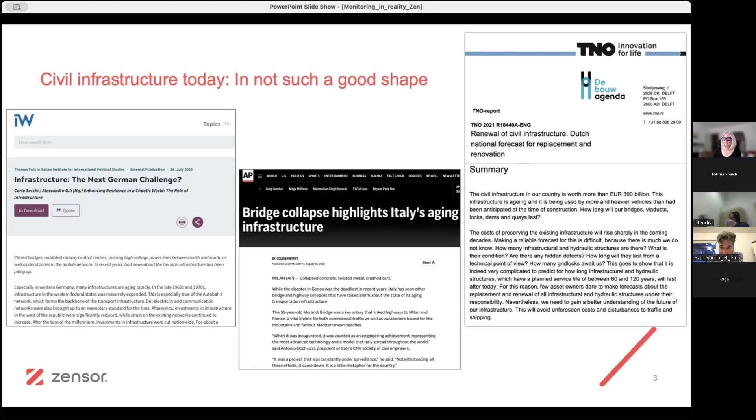Second to that, there's also another issue. A lot of the infrastructure you see, or almost all infrastructure, is built by what you call contractors, civil contractors - big companies that have people, big machines, and that really build the structures. An important background: the majority of civil infrastructure you use today is built based upon what you call a tendering process.

So a public authority says, I need a bridge in this location, it roughly has to look like that. Then they go to the market and invite potential construction companies to bid for that work. People say, okay, I can do it for this amount of money. Another contractor says, I can do it for that amount of money.

In the majority of cases, the cheapest bid wins. On the one hand, you could say this is interesting because, as a society, this is a way to save money. On the other hand, the situation has evolved such that the big construction companies doing those things economically are running on a margin of 0.5 to 1.5% of their revenue. That economically is actually totally crazy - it is super unsafe, meaning if anything goes wrong in any of those projects, that could mean, and it has meant in the past few years, the bankruptcy of an entire company.

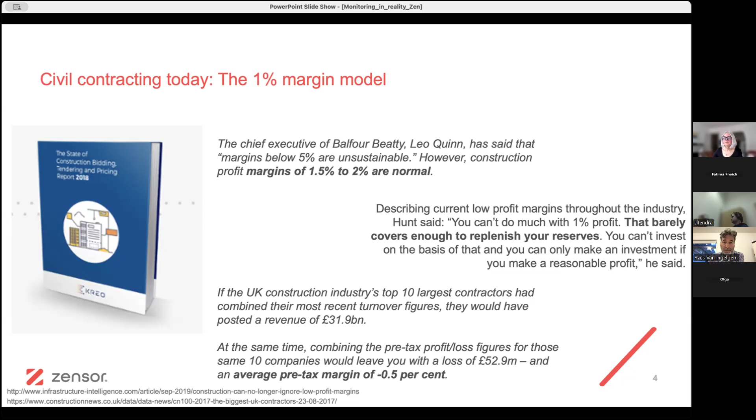And when the renovation was in progress, one of the professors at MIT said, this is strange because it's hard for me now to bike across the bridge. This costs money, this is a lot of hindrance to users. Is this the right way?

What he did as a result of that reflection is do a number of calculations. He asked, what would be an alternative? One alternative would be, instead of building the bridge, letting it age, and fixing it with a major overhaul years later, maybe I could do something else, or we could do something else. The approach he proposed was to build a structure and then continuously monitor, inspect, and do small interventions every time it is needed.

When you see a small degradation or a change that requires attention, and then he ran some models. If you would follow that approach, then at the moment the restoration was finished, the authority had spent $250 million. If they would have adopted a monitor, track, and fix approach since the beginning, on the same date, that bridge would have been in the same good condition, but for only $81 million.

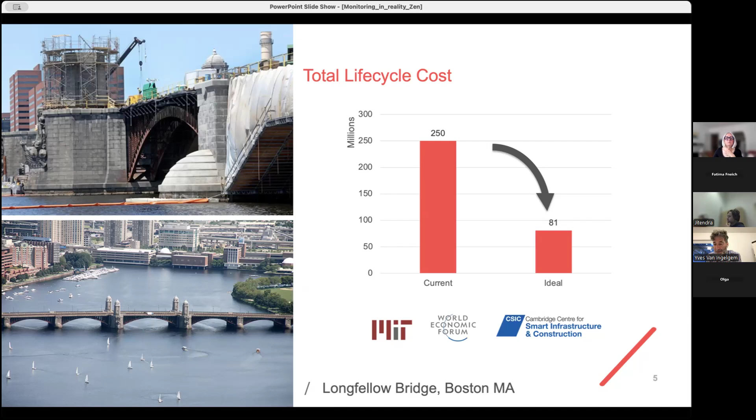So there's a lot of replacement going on that costs a lot of money. Something else you could do is avoid that a structure breaks or is damaged and you have to repair it. But you could also think about extending the life. And that also has a value because, of course, you do not have to build something new. You can still continue using the structure that you have. That has an ecological value, but it also has a financial value because that means you can actually defer the investments on that structure.

And here we're saying if we can increase the service life by 10%, some authorities can go into the billions of euros of savings. That's enormous if you look at countries' budgets.

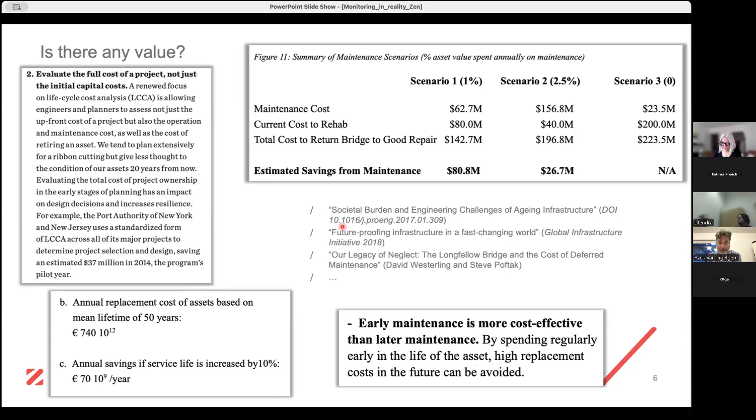So just to give you a few numbers on the why and the relevance of all that follow-up, and maybe of a lot of the things you are doing now in your research life. We're not there yet, this is not fully implemented at all, but there is certainly a value if we can take better care of the infrastructure we have as a society.

Any questions at this point, or remarks or contributions? Silence will be interpreted as a no.

Also, it can be that operational conditions are changing, so you want to keep checking if the building or structure is still fit for purpose. The extension of the design life, as said, can we use it longer than it was initially intended? If things change, if you want to do an extension or use it differently, can it live with it? Can it survive that?

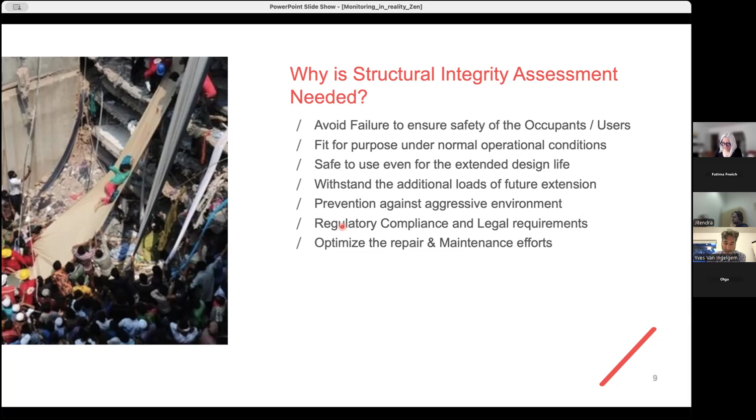The environment may change, loads, regulatory compliance, so legal requirements may change or evolve, or you just have to check if you're compliant to certain rules. And then, optimizing the repair and maintenance efforts, also on the general checking, what does it cost me to keep this building running?

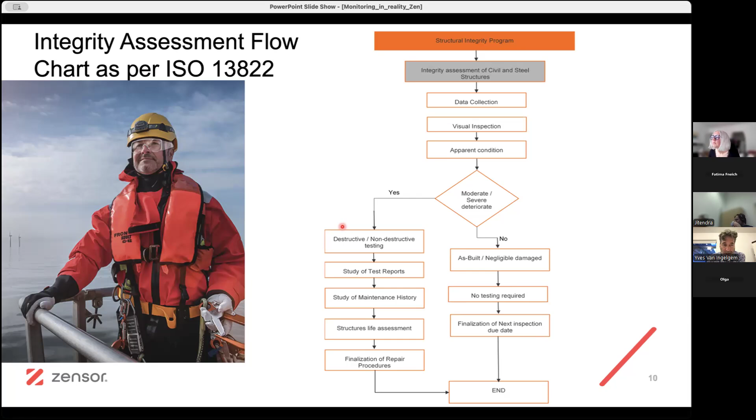One approach is not based on monitoring, it's based on doing measurements and inspections, and that is covered by an ISO norm. I've seen within the project it's sometimes referred to, a number of instruments we'll be seeing later, but that's really a program that is set up where you have regular inspections, a lot of people involved, a very regulated process. This is already very valuable because it gives you insights into the state of the structure, what's happening. We see deviations, yes and no, they can be interpreted, their severity can be assessed.

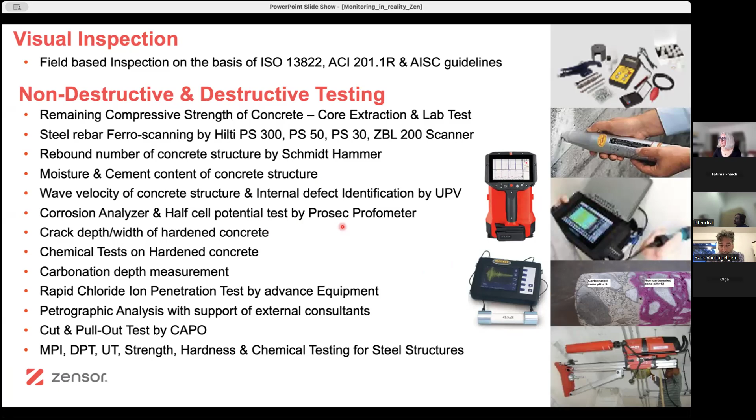And here you see a lot of those instruments used. These are examples mainly related to concrete-based structures, so you can look at the chemical state of the concrete. Is there chloride getting in there? Is there carbonatation evolving? You can look at the mechanical strength of concrete, you can look at the state of rebars, etc. You can really do testing of the materials.

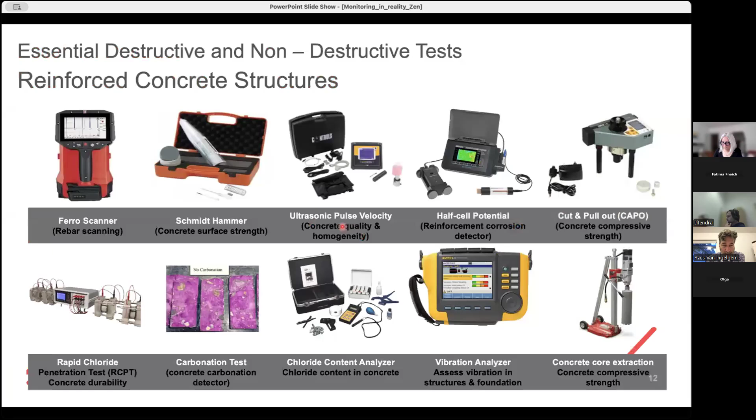This is just another view on a lot of the testing equipment used. So this is all kind of one-off inspections or test equipment, you go to the structure, conduct a measurement or a campaign, go back and analyze what you have found or detected. This is another technology to see what's underground.

This is so important that within this project there's even a specific PhD project aiming on that with Jitendra. If you look at a structure, you of course have to see how it behaves and what happens. But what is super important as well is that some of that behavior is related to the health status or the response to usage.

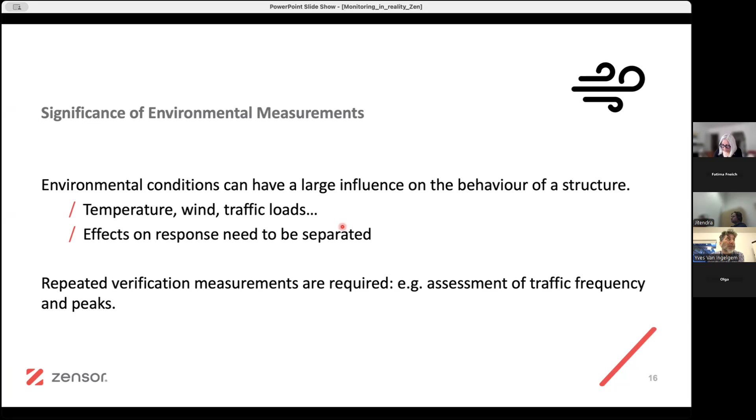But a lot of what you see is also affected by external conditions, and those can be climatic things like temperatures, winds, but also traffic loads, etc. These are very important because those influences have a lot of effect on your interpretation and your assessment of the situation.

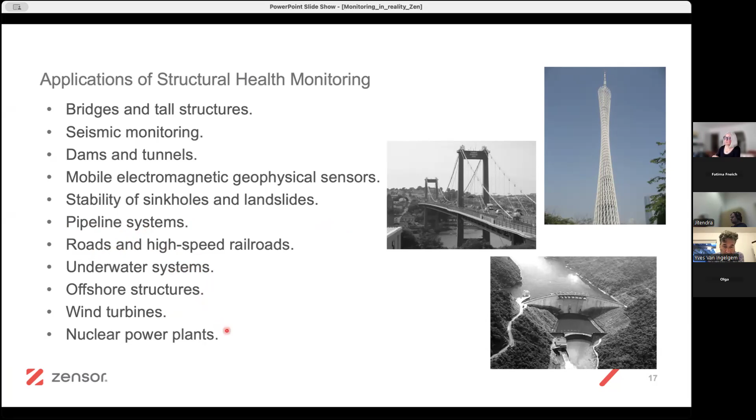Now, if you look at that monitoring and the assessment, where is it implemented? Actually, in a lot of structures. So you have bridges, general seismic monitoring, dams, tunnels, pipeline systems, which I guess you've already had a little intro on before, roads and rail, underwater structures, offshore structures, for example oil and gas, also wind energy, wind turbines, nuclear power plants. So it's applied in multiple domains.

And what you see in a monitoring system - this is the textual representation, but I'll switch to the graphical. Very typically, the layout of a long-term monitoring system is relatively similar. Here I'll give you a general overview, and a bit later on I'll give you a specific one on how we specifically approach it.

It all starts on the top left with different sensors located on the structure. The sensors, in this case, if you talk about continuous monitoring, are continuously generating data, and you can have both wired as well as wireless sensors. So that's what you can have.

Then you have an acquisition hardware, which is sometimes embedded in the sensor, sometimes not. So it's collecting the data, transforming the analog system into a digital system, and then standardly you will have a communication hardware in order to send the data collected to a central location, typically a storage and access location. Then your data is somewhere, it's collected, it is kept there, and then a lot of functions are required.

Because of course the data needs to be analyzed. That's also a lot of stuff where you are personally involved in - analysis, transforming the raw data into insights, into predictions, into state assessments. But standalone analysis on the data is not always enough.

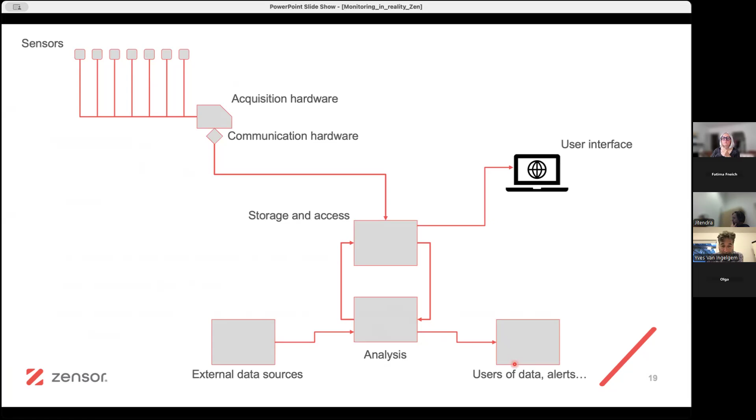Just as an illustration, imagine you have a high-speed train bridge and your monitoring system is monitoring the health of the bridge. From the moment you detect a situation of structural deficiency and the bridge should not be used anymore, you should have a direct connection with the train management system to avoid that more trains pass over, for example. So these are outgoing connections where you can share alerts or insights with other users of your system or entities or people that could value or could benefit from your assessment of the situation.

So that's the thing when it's running, but there's also an entire process preceding that, because some structures are identical, but if you look at civil engineering, a lot of them are not. And that means that to have a working monitoring system, there's a lot of stages you have to go through. The first stage, now I'm depicting the ideal case.

The ideal case is if you would be able to instrument a structure that is still to be built, and that you're also actually going to use the monitoring system through the entire design life. And then the first stage you have to do is engineering.

Engineering is not only selecting how to monitor, what to monitor and where, but it's also selecting, you can actually optimize or change your design based on what you're going to monitor. If, for example, you're going to use a specific structural element that comes with some risks, or where it withstanding the operational life is a function of the conditions it is facing, you can design or devise a monitoring setup that helps reduce those risks. So the engineering is not only engineering about your monitoring system, it is also matching the engineering of your structure with the engineering of your monitoring system to come to a more optimal and safer situation in the end.

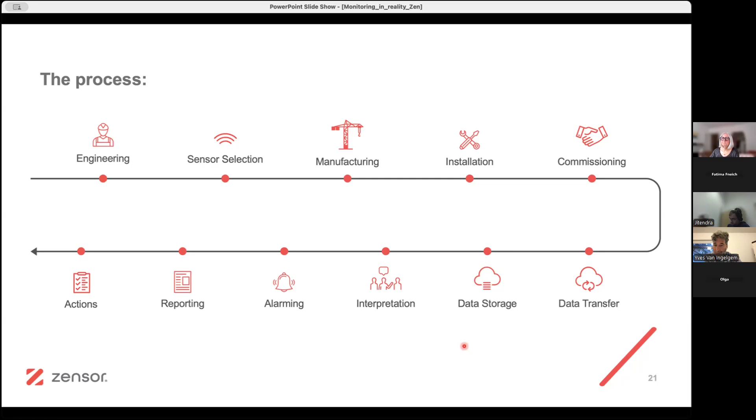Any other questions or situations you've encountered or wonder about? And then I'll carry on. And this is a bit about the future.

Things will evolve. First, they will be decentralized. So you will have maybe multiple monitoring systems working on the same setup. And there, at some point, they will have to come together because they need each other, or for interpretation, or because not one of them is fully covering everything.

Which also can lead to the fact that maybe you're not having centralized computation anymore, but a lot of that is happening, as people like to call it, on the edge. So maybe on the monitoring devices themselves, and only the insights are distributed.

And then the next one is even more advanced. It's when you start talking about smart structures, smart algorithms, agents, etc. At some point, it might be that the system itself detects a need for information, a need for data, a need for new algorithms, and might be able to request them or devise for a number of those. So that's really far future, but a bit more self-learning, self-aware systems.

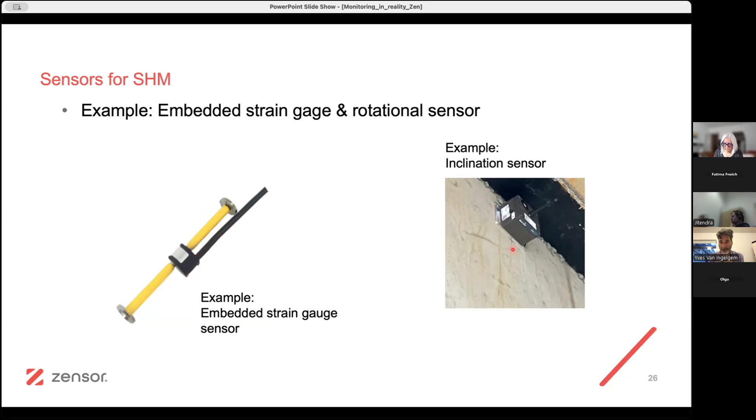And how is it measuring strain? Actually, those two plates, if the concrete would expand in the direction that I indicate here, the plates will move away from each other, so the sensor would grow longer, and the inverse for contraction. And then this is a wire that goes out, and this will go to a readout device. So not on the outside, embedded in.

This is another illustration of why it's so important to do your checks, because it's not only the location, but also which of the channels is your X, your Y, and your Z. May sound very mundane, but it's very important to know when you're doing it.

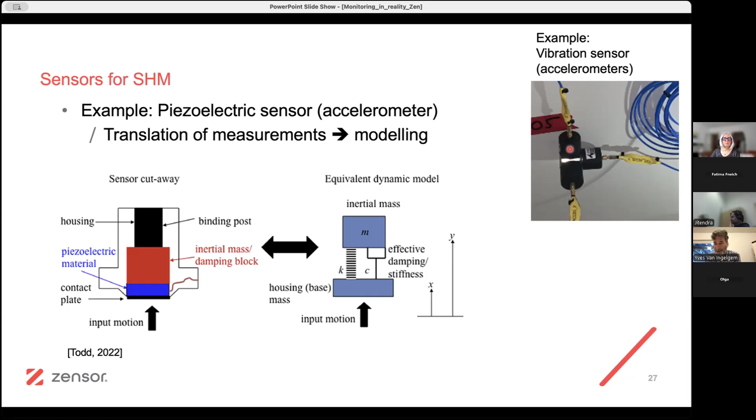Very often structures are very hard to access afterwards. This sensor, for example, is located inside a bridge where you need specific permission and time to get in there. So it's not that during analysis you can just say, oh, I might want to check if the sensor is mounted right—it can be that you have to wait 6 months before you can go check. That's another reason why all those checks prior to or during the commissioning phase are so important.

One of your goals can be damage detection—I want to detect damage in order to either fix it or avoid it happening again. That's more reactive. Sometimes you might instead want to see how the structure is deteriorating. Deteriorating isn't necessarily damage—maybe the structure is getting weaker, or the concrete is starting to degrade without it already being an issue.

But there your aim is a bit different, which means your tools—both your sensors and your interpretation—are going to be different. It's not an either/or situation, very often it's an 'and', but the aim you have will influence a lot of the selections you make.

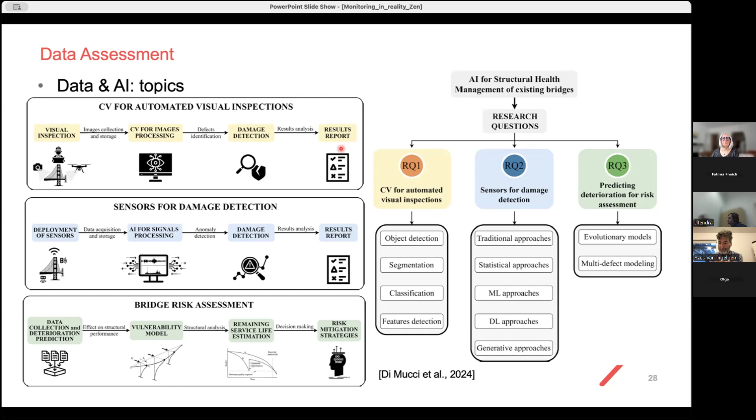All right. So first, I'll give a few examples from literature. After the break, we'll jump into reality.

So this is a number of projects, and there you can see what they've been aiming at: detection, location, or quantification. Level 1 means we might want to detect damages - is there damage, yes or no? Level 2 is, okay, I also want to localize it. And then the most advanced level is damage quantification.

But this is based on accelerometer data, so it's not based on imaging or drone inspection - it's based on accelerometer data. The higher the level, the more advanced your approach will be.

And so there's a lot of stuff being done, a lot on bridges, on offshore platforms, and the more difficult or challenging it is, the fewer examples you will have. It's mostly made on natural frequencies, mode shapes, modal properties, and vibrations.

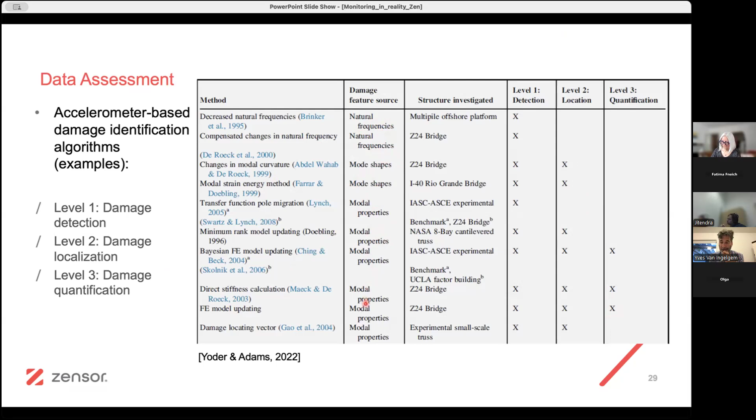So you see something coming. The examples they give here - unfortunately it happened, I don't recall if it was beginning of this year or last year, a bridge collapsed because of a ship hitting it. So your monitoring system can also be used to look at the environment. Is something dangerous approaching me? Is an imminent issue arising?

The same for vibrations, maybe earthquakes. If you see them coming, for example on a bridge or on a high riser, you might activate or change settings of a damping system such that your structure can survive the situation. So that's one thing - the same can be for a storm, like you see illustrated here.

Then the second is on the bottom side, the green thing. That means, okay, something is happening now - there's an issue, a truss is vibrating too hard, we see cracks growing, etc. These are things where you need to have a fast response - go and check, maybe ensure that you can still safely use it, etc.

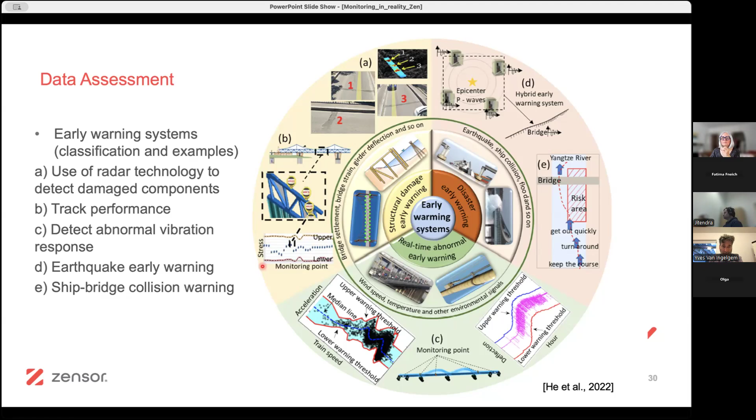And then some examples of projects just to give you an idea of how many sensors of what type are applied - this is also from literature, the same work that we have here. This is all on bridges. So here on the top, you have almost 170 sensors. And this I see is a stadium where you have 200 sensors, but sometimes also the number is lower.

Like here on this bridge, they devised a follow-up with a bit more than 50 sensors. While here, the Stonecutters Bridge - you will see an image later - there we're talking about more than 1,000 sensors on the structure. But of course, it's also a balance.

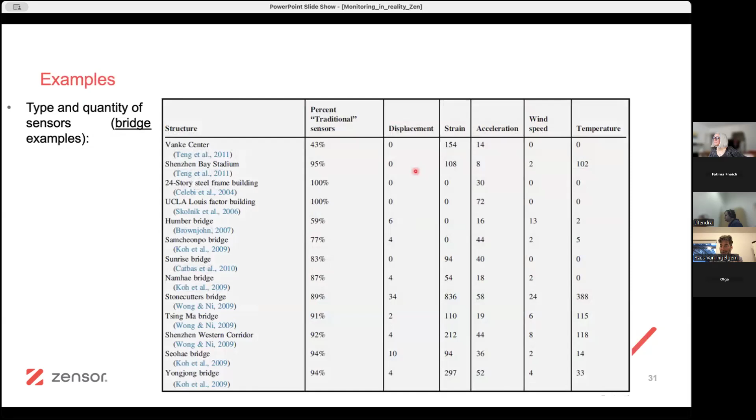This is what you will decide on in the engineering phase that I mentioned before. It depends on what you want, what you need. If people say, okay, how many sensors do I need - seldom can you give a quick answer beforehand, because it really depends on your structure, on the risks you have identified, on your philosophy. Are you only aiming at one of those three elements? Are you aiming at two, or are you aiming at all three? That will also influence how many sensors you'll need. So it's an iterative process you go through.

This is the example of that Stonecutter Bridge. So this is what has been instrumented there. It's also, as you can see, quite an interesting structure with two pylons, a lot of cables, and quite a large span.

I'm not sure if you're all familiar, but what they have applied here, I'll show a bit later, is weigh-in-motion systems. That's actually a system with which you can measure the weight of the actual traffic on the actual structure, which gives you a lot of insight in how to interpret the data or correlate the data between behavior and response.

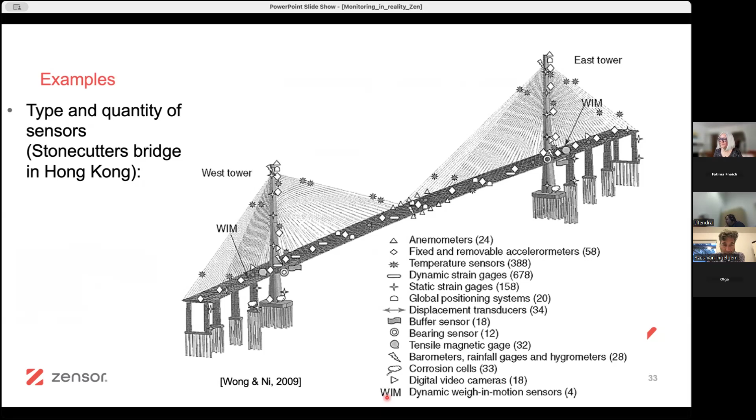This is a tower in China, Canon Tower. Also here, if you look at the sensors, we're also near the thousands.

Also relevant: it's not only what sensors you put there, sensitivity, but also sample rates. I'll show a few examples later on. The phenomenon you can monitor is a function of the sample rate. That's very clear, but sample rate also influences the amount of data you will generate, and the storage too, where you can store the data. Is it possible in a database, yes or no? Do I have to go to files or other options? So there's a lot of practical implications too on that sample rate.

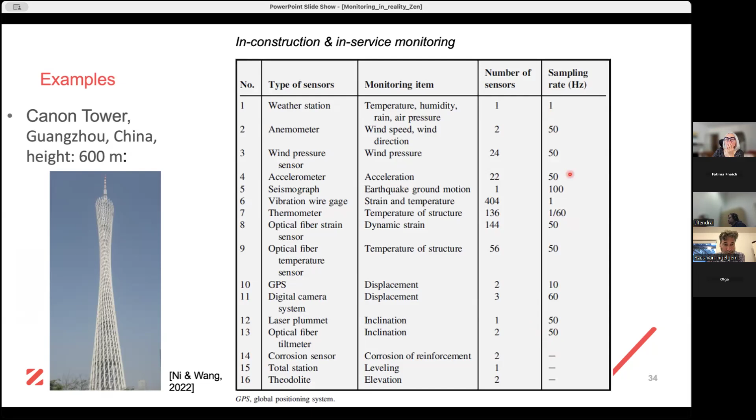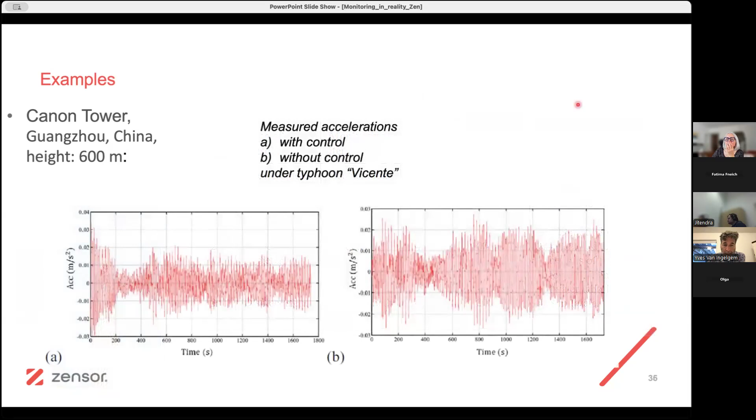This is also interesting, you'll see it later on, but more and more there's actually two fields: in-construction monitoring and in-service monitoring. In-service monitoring is continuous, but very often you also want to look at the structure while it's in construction, and that's for two reasons.

One reason is: what is the structure doing with my environment and vice versa? It's also a lot to do with stakeholder management. On a construction site, a lot of noise and vibrations are generated, and you don't want to create issues with the neighbors. So you want to check when you're making too much noise, and you don't want to damage structures around you. You're actually monitoring the effect or impact of the construction process on the surrounding environment.

But if you're building a structure and, for example, you know you have challenging soil conditions, you also want to check, while the structure is growing and being built, is my soil still holding my structure, or do I see initial indications that my assessment of the soil condition is not what reality gives?

Another thing: a lot of those structures are built out of concrete. Concrete has a curing time, so you need X days for the concrete to reach sufficient strength before you can start the next floor or level. Since a few years, there is technology available that can give you in situ the degree of curing of your concrete. Sometimes you have to wait longer, but sometimes you can move faster, and faster means more efficient and saving money. If you can start the 25th floor faster, you can also start the other floors faster, so your process or project runs faster.

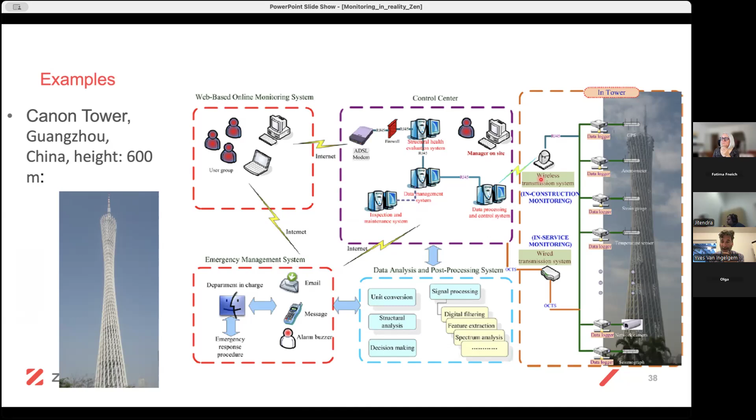So there's also a process-related side, I can build faster potentially, but it also gives you afterwards a sort of a passport of the building, because it gives you an indication of how the concrete cured in that and that location, such that afterwards you have a sort of proof that during construction everything was done as it was supposed to be, which is very important because of liability and safety assessments.

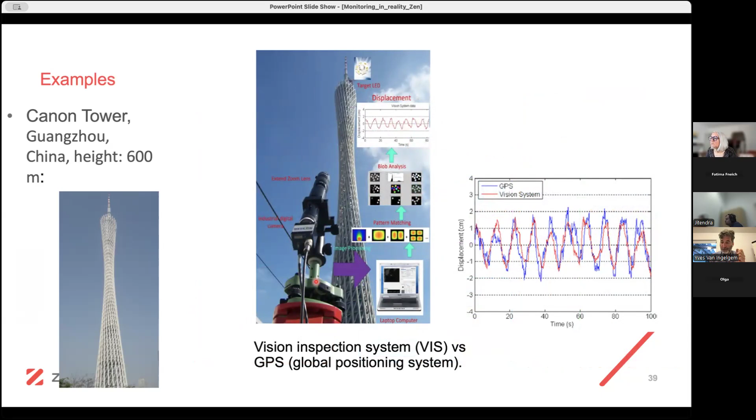And here there's also some external systems like GPS, but also visual inspection done continuously, and even the vision system can be used to monitor deflection or movement of the tower.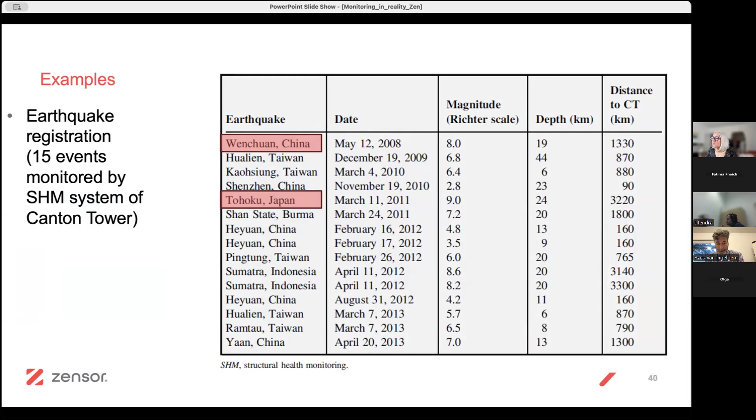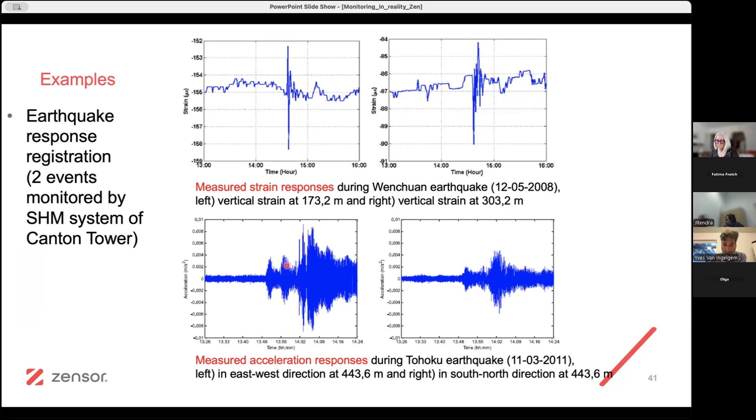In some areas, of course, earthquakes are happening, and there too you want to know what is the impact of the earthquake on my structure, and whether there's any structural deficiency resulting from it. These are the typical examples of data recorded, not just from what we recorded ourselves but also from literature sources cited before. These are strain levels and vibrations measured during an earthquake, that you then can compare to what you had modeled for the structure, to check if this was what we expected to happen.

Yeah, this will also be in there. So these are the references used, if you want. Any questions at this point from the audience? Or something you are missing?

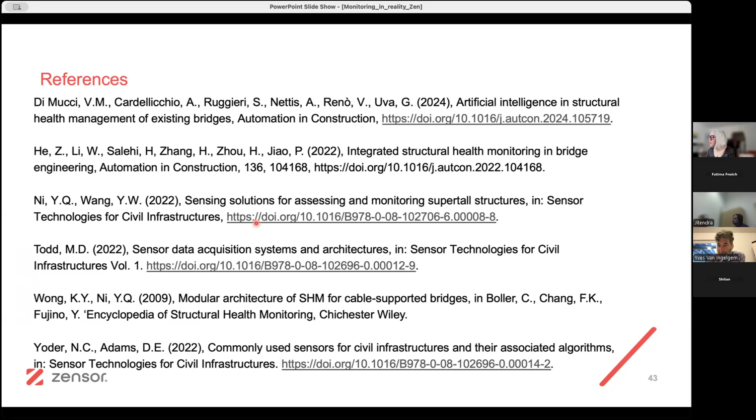This is a bit of going from one topic to another. Maybe one or two final items I would like to indicate.

One thing you still often hear is people asking what sensor is used to monitor a specific phenomenon, or that you can only do one thing with one sensor. That is totally not true. You'll see some illustrations, but with one sensor you can actually do a lot of things.

For example, if you're looking at a vibration sensor, a relatively simple case, you can use that sensor to identify and track natural frequencies. But you can also use that same sensor on a bridge to identify if the bridge was hit and how. So the same hardware doesn't always mean one hardware element solves one problem.

The last part is related to what I illustrated in the engineering part of your monitoring setup, and the sample rates. If you need a specific type of analysis done on the data, that imposes requirements on the data, on sample rate, on resolution, etc. Those are very important things.

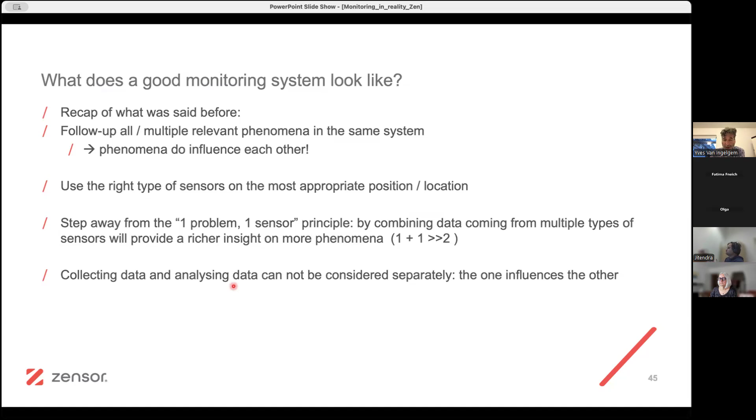One thing we do is make data transfer very flexible, because sometimes you have 4G or 5G access, sometimes you need a wired connection, sometimes there's only a bit of data so you can use a LoRa system, or sometimes there's already a fixed network. So there's a lot of versatility potentially in your communication system. The sensors can be wired or wireless.

The other relevant information you also read in. There you have to set up different types of connections, following industrial standards on data communication.

The design is also very important for the interpretation. Here we used BIM, the Building Information Modeling system, from which you can retrieve the geometry, materials, etc.

If you have, for example, a public authority working on highways, they will be sending people out to do things, and that's not manual anymore these days in many cases. Those are automatic systems, a bit like what's called a ticket management system. So if somebody has to check if a railing on a bridge is still straight, or if a coating needs to be visually checked on a certain part of the structure, someone in the morning will need to receive the order to go and do that. These are systems in which that ticket management is done.

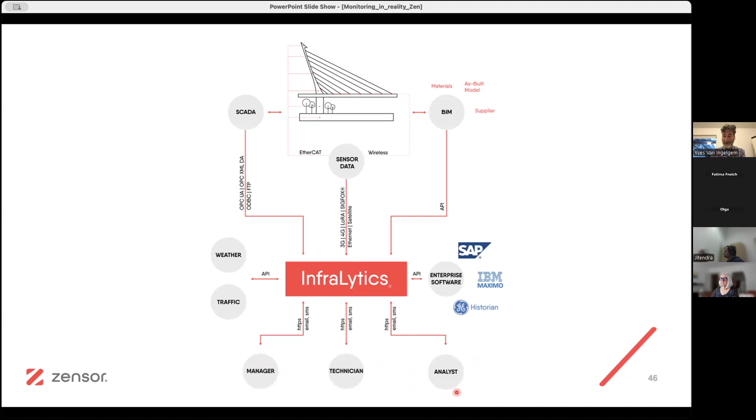Why do I put this layer here? Because you cannot send the same type of information or report to those three people. An analyst needs a lot of data and context. A technician needs very focused information in simple wording, what needs to be done and how. A manager needs broad, simple information, often translated to a financial context. So you cannot just give people the raw data and have them interpret it themselves. There are layers that need to be placed before those people can really do something with it in their specific job.

And then in our case, we make some fancy dashboards which can be 3D on the structure. This is the architecture of the system.

Our system internally is a cloud-based system. We have everything running on the Amazon cloud, AWS, continuously, with functions for data ingestion, data cleaning, data checking, and storage in specific databases. InfluxDB is a time series database where time series of data can be stored and worked with very efficiently. If you look at context data, you would more go to an SQL type of database.

Then, of course, all the analysis is running in parallel with that. In our case, very often it's happening in Python, where you do stuff in the time domain and the frequency domain. And then here's the outgoing layer: alarms, reports, dashboards, but also output again to information systems like BIM and the ERP, which is enterprise resource planning, who goes and does what, where.

Now it's time for you to work. Which are the advantages and disadvantages of a wireless system? I need at least five.

Wires serve as initiation sites for cracks, so being wireless means you eliminate that variable. Secondly, with the wired ones you need to exchange the wires as well, right? Whereas, depending on whether the wireless one is passive or not...

Can you go back to that? Can you explain that a bit more? What? I couldn't hear you, sorry. So first you refer to initiation of cracks, then you refer to exchange, but there I would like to understand a bit better what you want to say. Well, basically...

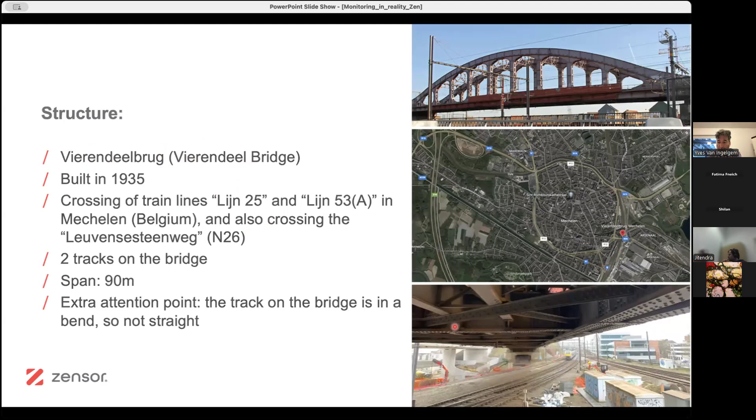This is used a lot, and the owner wants to prolong the operational life of the bridge. It's a steel structure. This is the bigger view of the structure.

This one we have instrumented with a lot of sensor types. The goal was to see how is it doing, structurally how healthy is it still, and how does it evolve as a function of time. I'll go back here. So one of a number of things that we did...

For a bridge, what you typically have is that one part of the bridge is fixed to the land on the abutment, and on the other end, here on the right, you have to allow for some free movement, because under loading, but certainly under temperature, a bridge will expand and contract. If you fix the bridge at both outer ends, it will generate a lot of internal forces which can create cracks, etc.

So what you typically need is, on one side, what is called a bearing, allowing the bridge to move horizontally. On this bridge, the bearing was designed in 1935, so it's an older concept. But we still want to know, is that bearing working? What you see here is a displacement sensor we installed to monitor the horizontal displacement where the bearings are located. The thing you see here is the concrete, the land side, and a bit higher here you have the bearing.

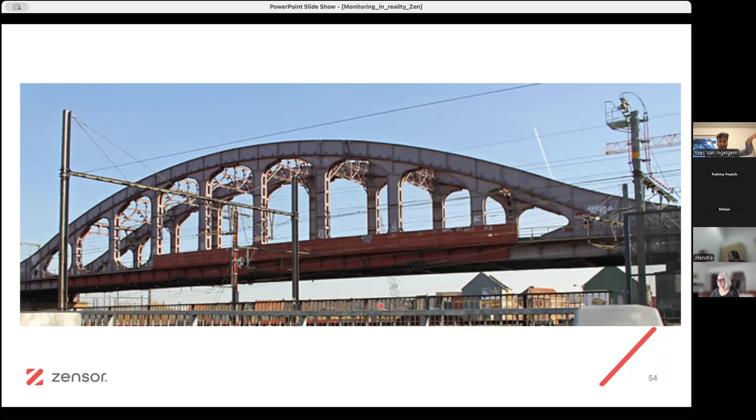If you have a number of inclination sensors, you can calculate the full bending, and from that determine how much the vertical deflection was. This is one of those sensors that we installed, an inclination sensor, and this is one of the codes we use to identify the sensors.

Another interesting element here are the magnets, because we do not want to create stress concentration points or drill into the bridge structure. So a lot of the sensors we install use long-term, very strong magnets instead of drilling. It also accelerates installation, and you're not affecting the main structure.

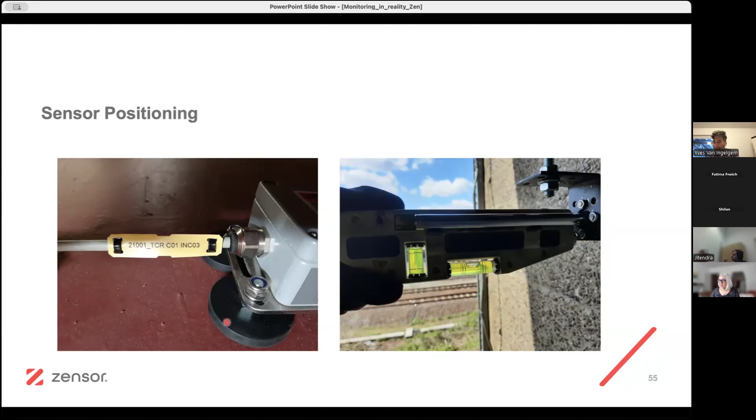And this is some of the results. We measure the deformation horizontally, the bridge contracting and extending, but also how much weight is on the bridge. We decided to measure with high resolution the vertical displacement at the bearing, because if there's a heavy train on the bridge, the bearing will be partially compressed, and that compression is proportional to the weight. With the continuous data stream, you can identify a passage because it's a peak in that compression.

By tracking the amplitude of the compression, you also have an indication of how heavy that train was, and that's what we put here. The red trains are the heavy ones, the yellow ones are the medium, and the green are the light ones. This tail on the right means there's a lot of work traffic, like single trains passing by.

What is cool to see is the date - we've been following up on this bridge for a while. This was during the COVID period, and this is when one of the measures ended, and you saw that the trains were getting heavier because there were more people sitting in the trains. So there was an increase in heavy passages and a decrease in light passages.

Why is this important? It's interesting to see, but your bridge has been designed based on an assumption of how many passages of what type you'll see, which influences fatigue of the structure. You start with an assumption, but in reality things will change.

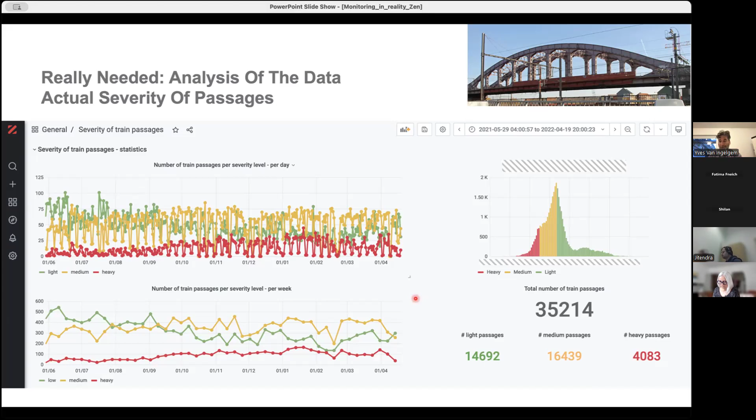This bridge is there since 1935. Steam engines have driven over it, and other types as well, all with different weights, trains have become longer, etc. So what you need to do is continuously update your lifetime expectation based on the real loads taking place. You start from a displacement sensor, but you're actually building up data to assess what is the remaining life in this structure.

This is the raw data, the vertical displacement. Those are two sensors, the yellow one and the blue one. This is the real data, and you see an evolution - you see a kink here.

The gray curve is the temperature, so that's expansion and compression as a result of the temperature. And then you see spikes - those spikes are the passages.

So what we look at is, for example, what's the amplitude of this jump as a function of the temperature? If this were linear, you'd have a fully normal elastic behavior of the bearing, but that's not the case - you see there's a little bending there.

You also see that the response of the two bearings is different. Because of age, the two bearings are different, and they no longer have an elastic response. Very interesting to know - if those bearings are not acting exactly the same left and right, the bridge is actually going to bend. Because if one bearing gives more resistance than the other, the bridge cannot just expand and contract, it will move a bit, start bending a bit, creating internal forces and potentially internal stress concentrations that you do not like.

On the left side, we isolate every individual event automatically and create those curves. What we also do is the inverse: we filter out all the individual events and we only look at displacement.

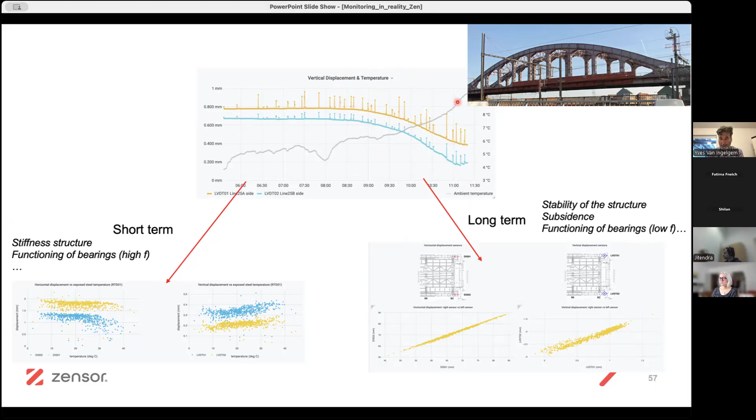You're also looking at the natural frequencies. It's funny because we were able to identify the natural frequencies both from the accelerations - there are also accelerometers on that bridge - but also from the strain data. So we could get the natural frequencies out of the strain, generating very nice spectra out of the strain. What we used here are classical foil strain gauges, no optical ones.

We have strain gauges on the vertical parts, bending and tensile, on the arcs, and on the bottom part. And the vertical lines - the client made a finite element model of the structure, and from that they derived where theoretically the natural frequencies would be located, which we could match.

We see that very often we are very near to what we measure compared to the model. That's already positive, meaning the model is good, and that there's no major structural issues with this bridge. These are the frequencies that you would be continuously following up in the monitoring. As I said, a very interesting point is that we can actually track them too from the strain data, which is very cool.

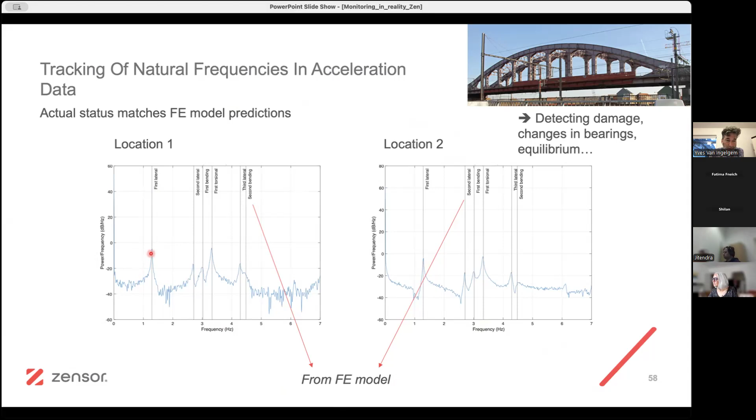Something we do as well, because you can look at phenomena, but actually what you want is the actual aging of the bridge. We calculate the true rainflow counting - what are the actual stress cycles that this bridge went through - to see how the damage is accumulating in reality. You can also identify sometimes when there was a jump, or in other structures an inflection, where the speed of damage accumulation accelerates or slows down.

Which you can also match with changes - maybe traffic changed, maybe there were works around the structure - and as such you can get insight into what things are good or positive for the bridge and which are bad or negative regarding the long-term life.

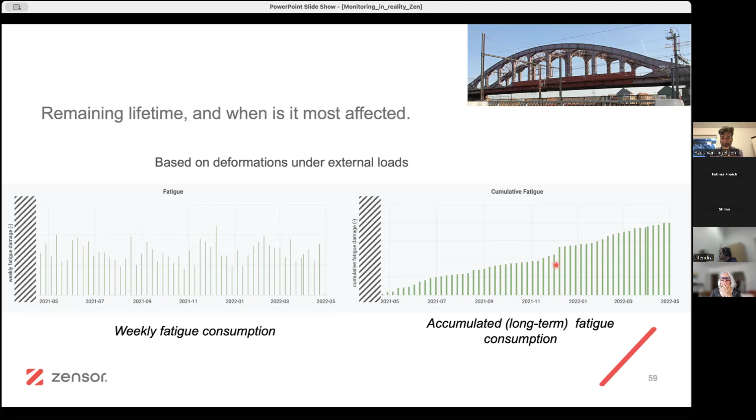Any questions or remarks on this one? If not, I'll show a few more examples.

I would have a question about temperature, but I will not ask it. But we have 15 minutes left before the start of the presentation of Mario's. So if you could, as we started late unfortunately, maybe stop 5 minutes before 11, so that we have a 5-minute break. Okay, thank you, yeah we'll do. No problem.

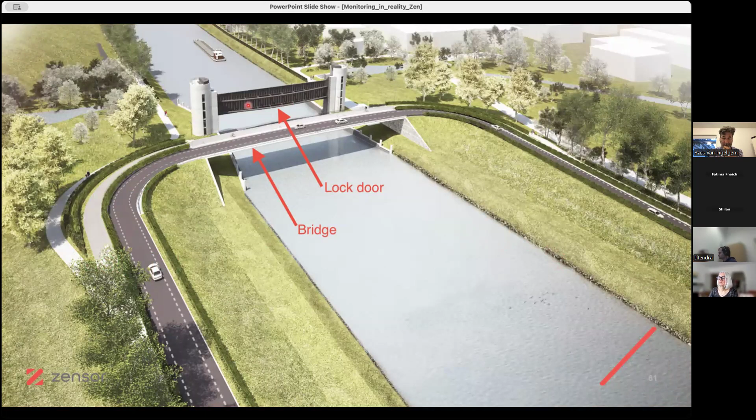So now we go to a fully concrete structure. This is a lock somewhere in the Netherlands - not a lock to equalize a water level to let ships pass on a river or canal, but a lock used to shield off the land when the water level is getting too high. Focus here is on the concrete.

Why monitoring? Because the contractor here, together with the owner, the authority, wanted to use a number of alternative types of concrete - concrete with a different composition for lower CO2 impact, and also concrete containing partly recycled material. They wanted to see if this concrete is performing as well as normal concrete, or better, or worse. We're talking about these structures here, the tower and the sides.

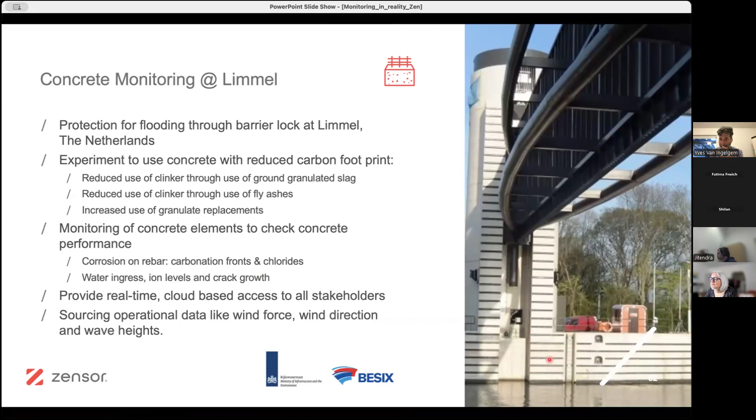What we did was embed a number of sensors in there. The bottom one is a typical reference electrode, so with that you're going to check how the electrochemical potential of your rebars is evolving.

If that changes in a certain direction, you might have corrosion there. This is an ER sensor, electrical resistance. Here we can measure the material loss on this element. So if there would be corrosion inside, we can even monitor how much it is.

And this sensor was pre-embedded in concrete, but it's actually an electrical conductivity sensor. So we can monitor continuously the electrical conductivity of the concrete, which gives an indication when there is water ingress, but also when there would be chlorides and such.

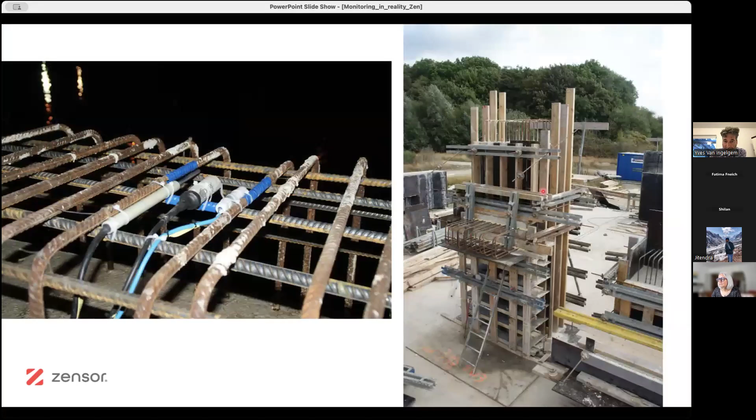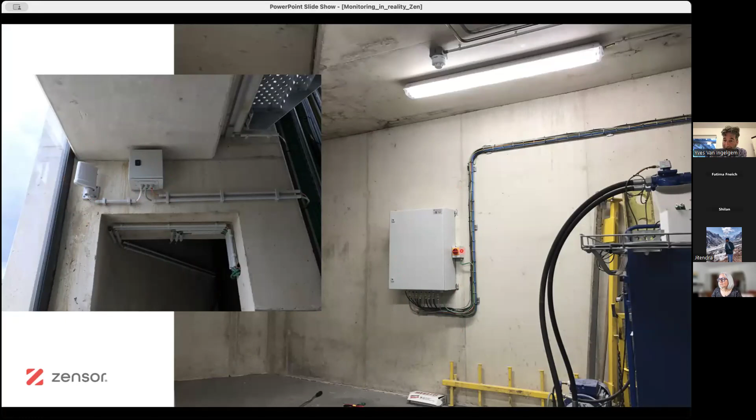So these are the sensors when they were embedded during the prefab process. These are the same sensors on a different location. And this is then the reality, the readout. So all sensors are wired to an acquisition unit. And then on top of the structure you have an antenna, because we're also using the 4G network here. So that is what the practical system looks like in reality, a clean install.

Interesting one is this, because of course structures degrade because of loads, which can be mechanical, etc. But you see here a situation where there's a higher piece of land, there's a train track on top of it, and what you can have in that case are stray currents. So the current of the train is getting the current from the catenaries, from the top, and is then normally re-injecting them into the rails, and they can travel back to the substation.

But sometimes the currents go elsewhere, that are called stray currents. And here you see anchors being used to stabilize the soil. Now, if those stray currents go wrongly, they can actually get into those anchors and out, and make them corrode, which would actually weaken the soil here.

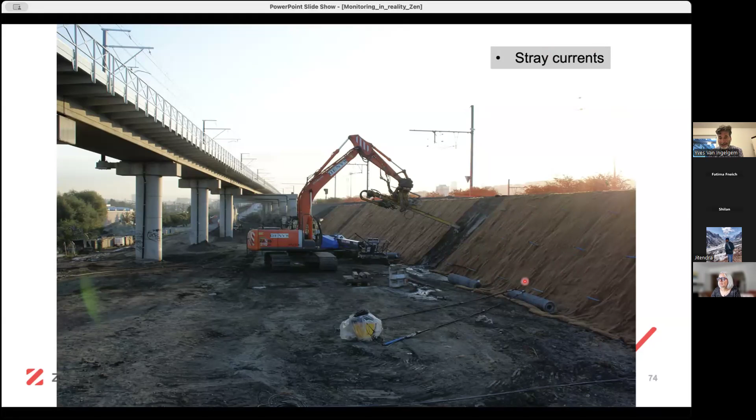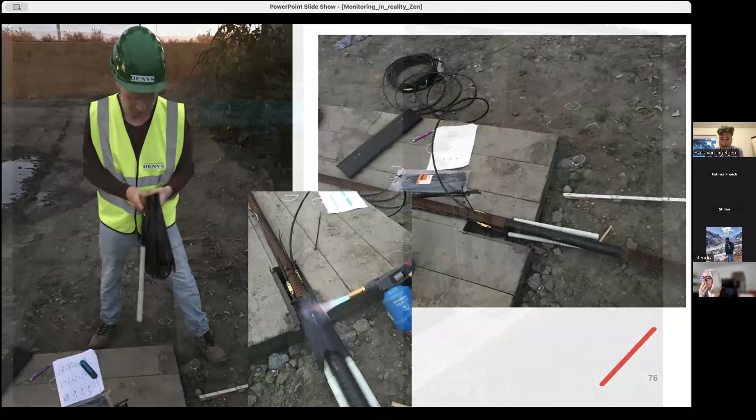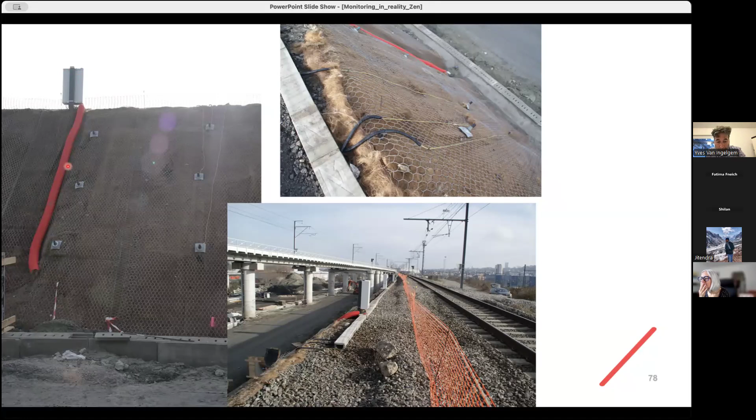So that's why we devised and installed a number of sensors in and around those ground anchors. This is the installation process. Then we have an acquisition unit there, continuously monitoring. This is after the installation, so this is the unit, all the cables going through a protective tube.

In the soil, we can really see where the currents are going. So this is not monitoring structural things. This is actually monitoring electrical fields, electromagnetic fields that might influence your structure internally, corrosion related.

And the bridge has now reached a monumental state, so they want to use it longer. And they have actually devised a new concept where you have a tubular protection and some rubber elements in between. We have instrumented some of those to monitor how the cables are moving under wind loading conditions. It's with bolted connections, so we also continuously monitor the bolt tension or the bolts holding, etc. And as such, we could validate if this new concept is working, yes or no.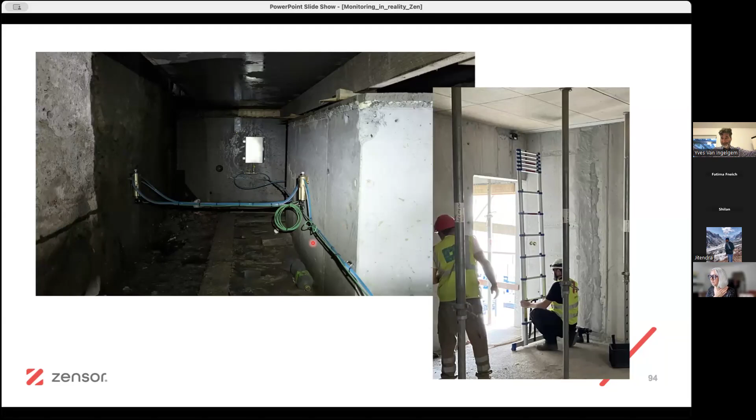Here we installed in the basement a sort of water leveling system, which we can track very precisely to see if there's any vertical movement. It's a tube filled with water with multiple points where it surfaces, and we continuously measure the level of the top of the water surface. It's the Archimedes effect that people used for ages when building, which you're now doing automatically and continuously.

I want to introduce this one as well, because loads can be very different. This is where we actually have the interface between users and owners of infrastructure. This is a tram switch, and a contractor is responsible for the health of the switch, but the trams are managed by the public transport company. If the public transport company doesn't maintain the trams well, if the wheels are not round or deformed, or if the axles are bent, they generate a lot of hits on the structure.

As such, the rails, but certainly also the switches, will deteriorate. So what we monitor here is actually the dynamic behavior, the impact of the trams on the switch, such that the contractor can actually warn the public transport company: you're damaging our machines, our assets. So it's also preventive, because when it has to be replaced, it's at the cost of the contractor. But of course, if your client is damaging the structure, you also want to know. So this is also an application of monitoring - what are people doing with my infrastructure, and is the degradation because of natural processes or because of bad usage?

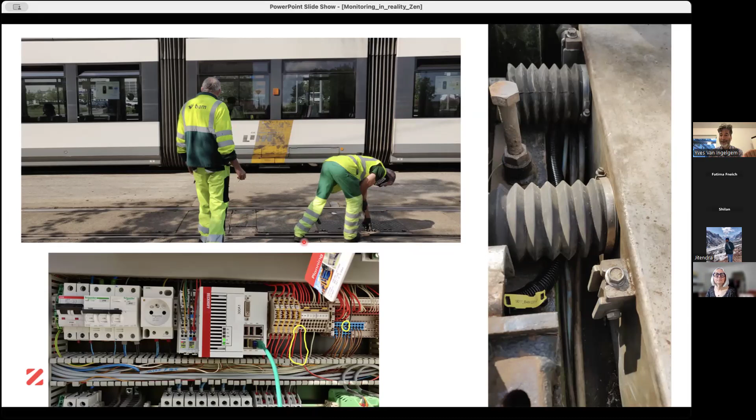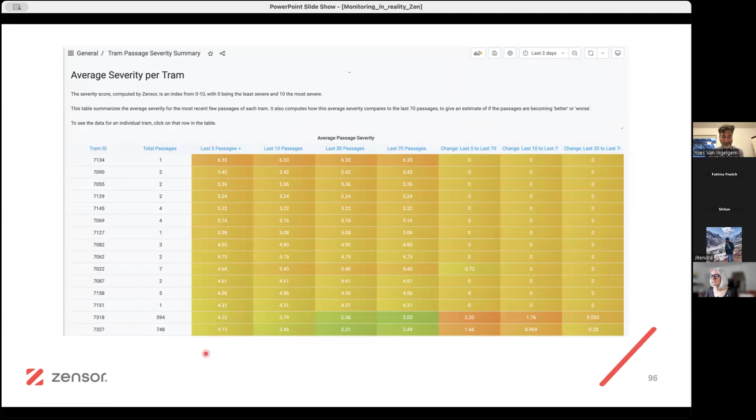And this is the system we have behind it - the more red it is, the higher the impact of the tram on that switch. So the red ones are the bad ones - those two trams are bad trams.

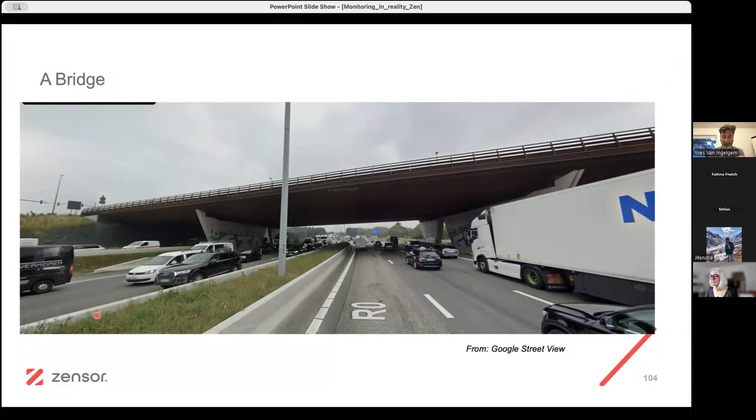Then maybe a final one. This is a structure, a recent bridge over the ring road around Brussels. The big challenge here is that it's made out of weathering steel, which for Belgium is something new in civil infrastructure, so we were asked to devise a monitoring system for that. So that's what you see here, the bridge from the bottom. Also here we installed deformation sensors.

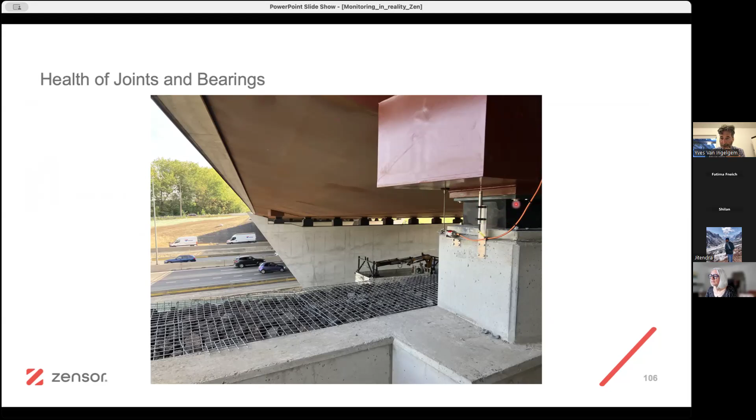This is a bearing, a modern bearing, so it's a rubber block that allows movement in all directions - up, down, left, right, front, back. So if it's heating up, the bridge can move. We monitor the vertical displacement and the horizontal one.

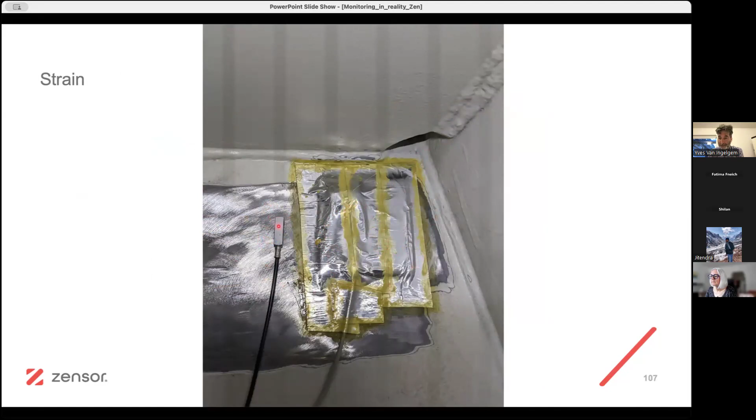Under here you see strain gauges, so we monitor the deformation of the strain at certain stress concentration points, and the temperature for reference. Inclination again, so we look at the high level deformation. These are the accelerometers, high sensitivity.

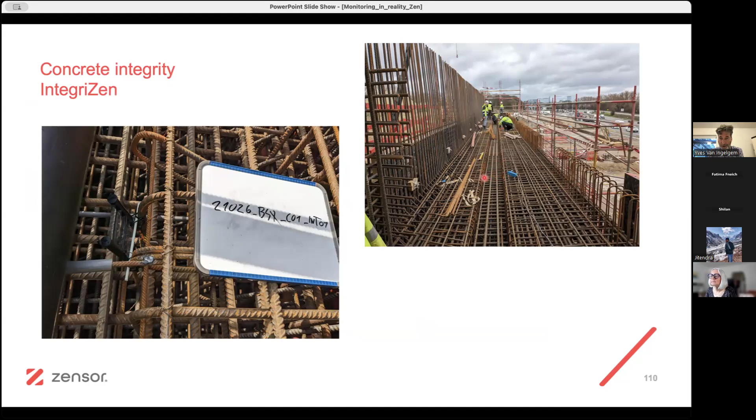But we also put sensors in the concrete. This is a gutter, during the construction, where the water will be evacuated - also there it was tracked. A zoom on the conductivity ladder. And then also corrosion by electrical resistance, where we monitor the loss of steel as a function of time, and whether this is going as we expected.

Any questions, remarks, suggestions at this point? If not, I will terminate so that you can.

So I have a curiosity question. You have in one of your applications embedded sensors measuring the apparent resistivity - is it something you developed, or is it something classical? Yeah, it's something we developed. We have a system where we can apply a current and record a voltage response in AC, and then we can correlate that with physical behavior in the material.

Okay. So I will maybe connect - if you can send some information about this, I can connect with people in our universities working on resistivity and electromagnetic measurements. They would be interested. Yeah, sure. Thank you.

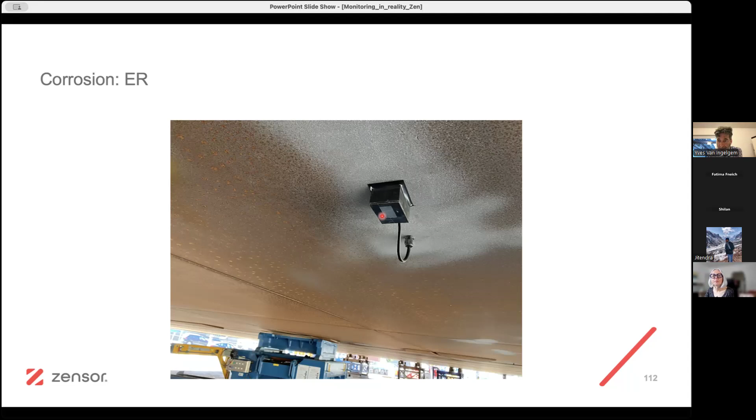Any other famous last words? Okay, so not many questions.

So I have to thank you again, Yves, for your presentation with a lot of use cases where we see the complexity and the challenges that have to be faced.

So now we are designing new sensors. I don't know how long it takes to go from an idea to something that is used on site, but I guess maybe some of the work we are currently doing in this project will go on site one day. Yeah, absolutely. So thank you very much again.